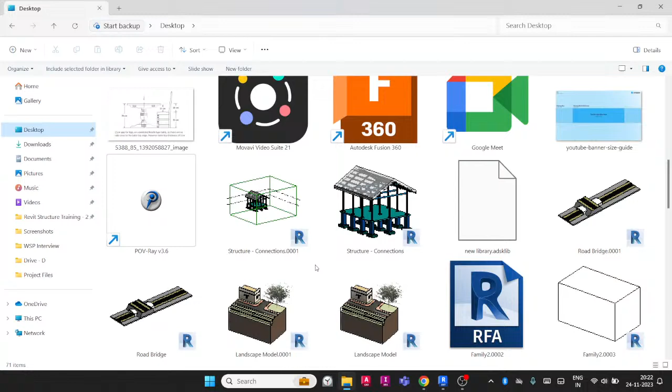So now let's go to the desktop. I'm going to create a new folder.

The primary structure, for BIM modeling, let's say: in a company, there will be a company name in a common structure. Inside the company folder, we will create one folder for the BIM team. Inside BIM, we are going to create a folder for the project name.

So in the project, we will have different folders. If there is a project, what will happen? We will receive some tender. So let's say tender documents, that is our input.

And there will be some working files, some files we are going to share, some files we are going to obsolete, meaning they are ignored. There can be other files also, so we need a working space.

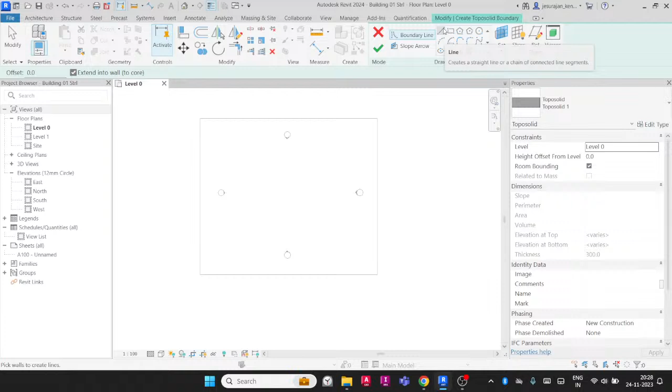If I go to create with a sketch - this is actually the topo surface, right? Let me create that surface first, and then finish. Let's go to view, 3D view, and this looks like a floor, but this is the topo solid, the ground.

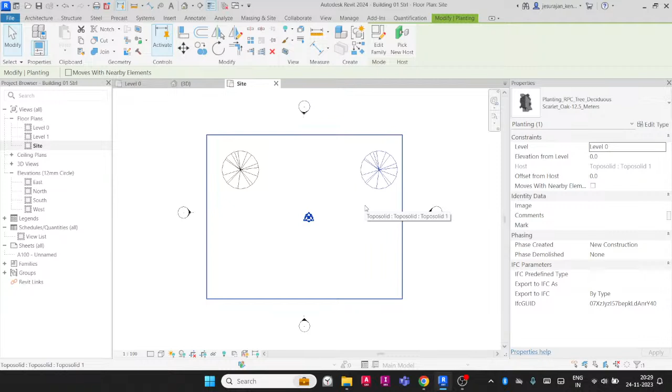If I go to massing and site, this is the topo solid option. I can also import a survey file, create with the create from sketch option. The second one is site component - site component is actually a library element. You can load it and select from the list and place it wherever you need - for example, a tree, an electric pole, a pump, manual pump, or a borehole, anything. You can just load it from your library and place it.

If you go to 3D view, so this is how it looks - these are RPC elements. If I go to realistic mode, you can see this is how it looks. Basically they are used to locate the tree. Actually the rendering is not our focus - our focus is to record building information.

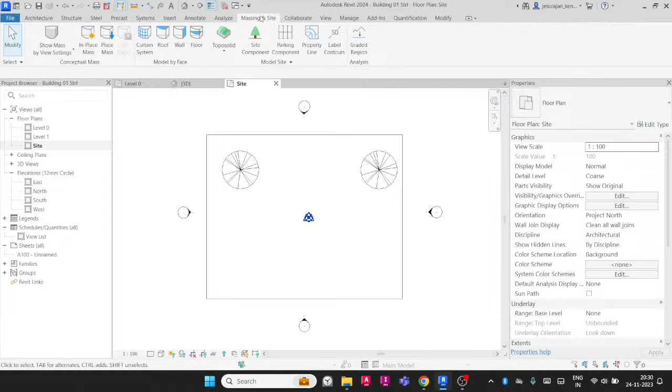Let's go to site, massing and site, and we have some parking component. In parking component, we have a category called parking, and this is my family - this is a library element. If I go to 3D, I can see them in 3D also, and I can see them in the 2D plan also.

The next one we have is property line. This is our property line - let's say I'm going to mention the ground around 500 meters or 300 meters. I can have the ground data, and then I have to mention where the road is, right?

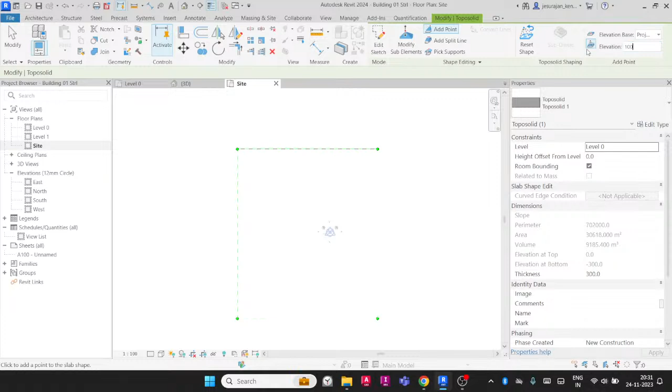Let's go - if I select this element, I have some modify options. I can modify this surface by adding a point. I can mention the height - add point height, let's say 100 mm - and I can give the ground level. In case you are loading from AutoCAD, then this point height will come from AutoCAD.

Yes. Okay. Yes, we can get. Okay.

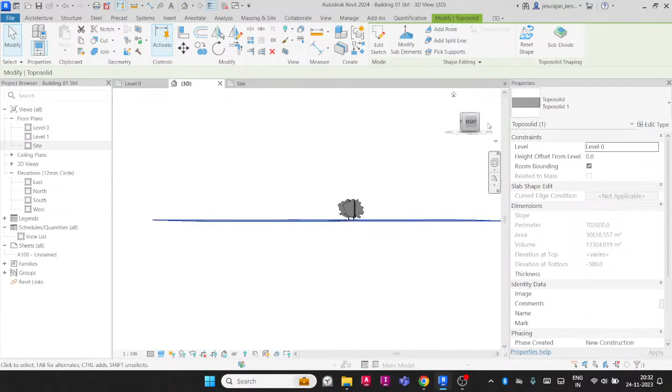Now you can see I have just taken add point, then I have added all this point. Once you finish adding the point, you can give escape. You can go to view, 3D view, and you can see the level difference. For now I don't see them much, right? So there are level differences, but that's not that visible - contour lines are not visible, right?

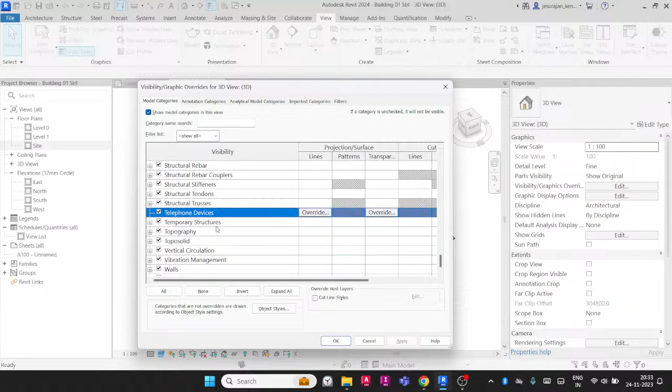To view contour lines, you have to go to the same, go here, go for property line data. Let's go to visibility graphics, go for site. So everything is enabled. One second, we have to select topography - topography, triangle edges. Okay.

Contour display - if you go to contour display, this will let you define from what interval you want to see the contour. For example, let's say every 100 mm I want to see the contour interval - then these are called primary contour. Or let's say every 500 I want to see the primary contour, and every 100 for the secondary contour. Start from below 3 meters and finish at above height 30 meters. Our level is coming in between at 0, right? Then it is okay - I'm going to say okay, okay. Now I can see the contour lines.

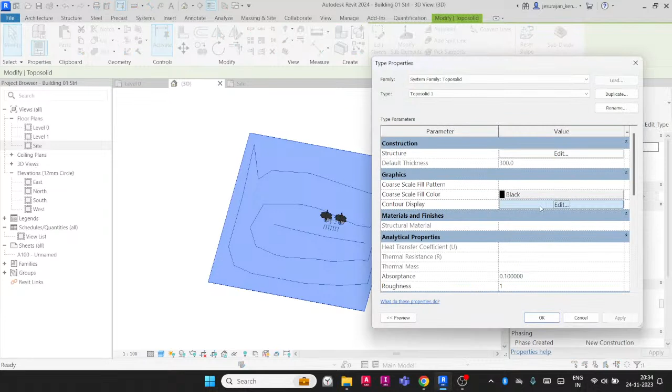You have to select the topography, go to edit type, go to contour display, go to edit, and set the settings there. Just do trial and error and you will understand. Say okay, okay, done.

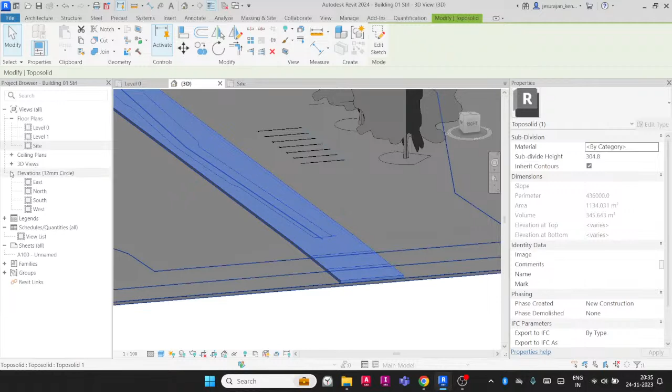Okay, if I go to site, I can mention this is the road edge. I can draw the zigzag line also, I can draw arc line, I can use all these tools to make my road boundary. So I have to know that this is my road edge, so for that we are using this.

Okay, now from my road, where is my property? So I should know my property line. So we have the tool property line. You have to draw the property line. You can draw by sketch or you can also enter values. Once you finish the sketch, you can just close.

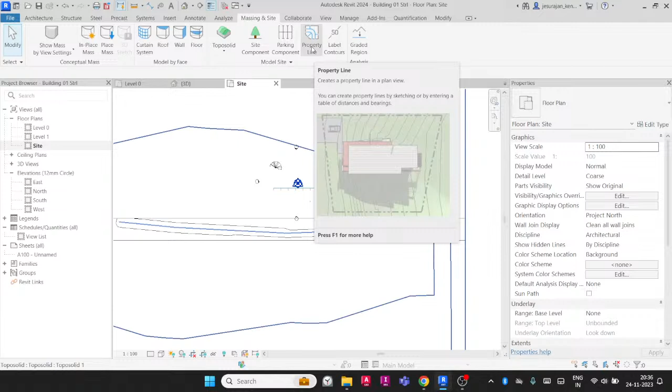You can also place annotations, northing, easting, coordinates you can place, like bearing you can place. Okay, property line, we have two options: create by sketch, create by entering distances and bearing.

Now let's go for sketch, that's always easy. And I'm going to say from my road, 1 meter. From the road boundary, in case let's say 5 meter. Okay, and this is my edge. And then I'm going to have, so I have offset, let's make it 0. This is like this way.

Okay, somehow it's like this, and this is my boundary line. Once I finish the boundary line, I can see the dash line, and I can also edit the table. You can see distance, northing, easting, bearing, line type I can mention. Okay, so this is our boundary line.

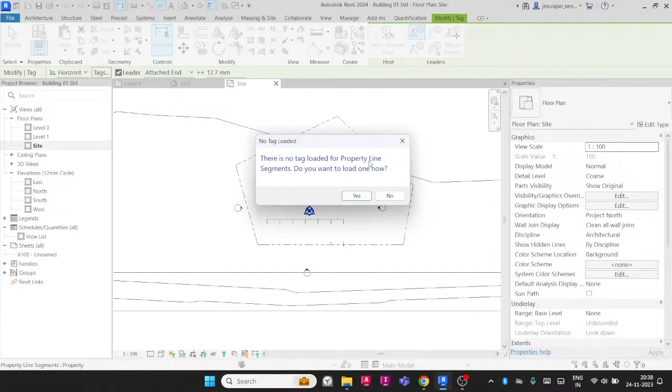We have to pin it, we don't want to miss the boundary, so we have to keep it pinned. Now I can go to annotate and I can tag the element. So this is showing there is no tag loaded. Say yes and go to US annotation and go for civil. Here go for property line tag.

Okay, so we have to choose 3, just load them. I think now it is loaded. Select and then change its type. Distance and bearing. Create similar and place.

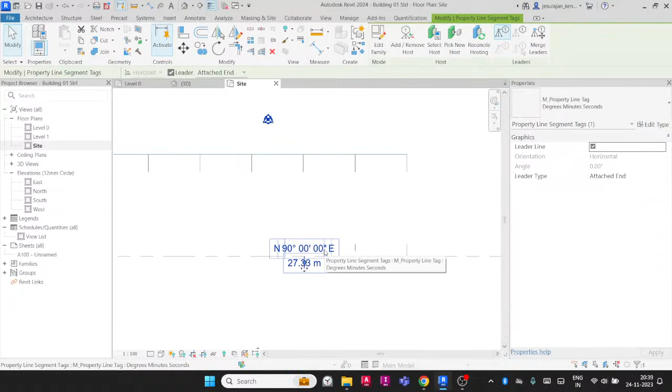So when you are doing a survey drawing or site map, you have to mention the property line. So to find the correct coordinate, actually this is not a GPS, so point to point we are mentioning the bearing. This can be with an error of 2 or 3 seconds, even a total station comes with a 3-second error.

Okay, so finally we have to get the average only. So how do we do it? The surveyor will do it, and he will give the distance and bearing.

So initially, how to take the coordinate, that was a question for me also. In case if you take Andhra, every state has its own geotechnical team, and they are creating benchmarking points, primary control point, secondary control point they are establishing. So from there we can take the coordinate and give reference to our project. There will be some error, but that is acceptable.

Yes, yes, they will give. Correct.

Usually for now they are doing it with Civil 3D, AutoCAD. You can also do the same with Revit. Once you are drawing it with AutoCAD, you can import and pick the lines. Okay, so now we have our boundary.

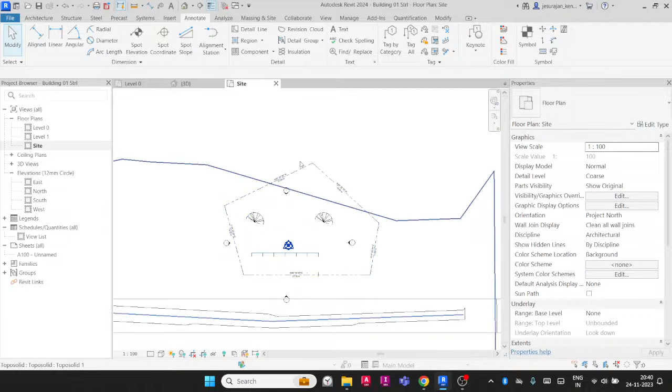If you go to massing and site, see this next one is label contours. So when I am labeling contour, I can mention its height. For example, I'm taking this tool, and you can see I have to just draw from one point to another point, and you will see the label based on the scale.

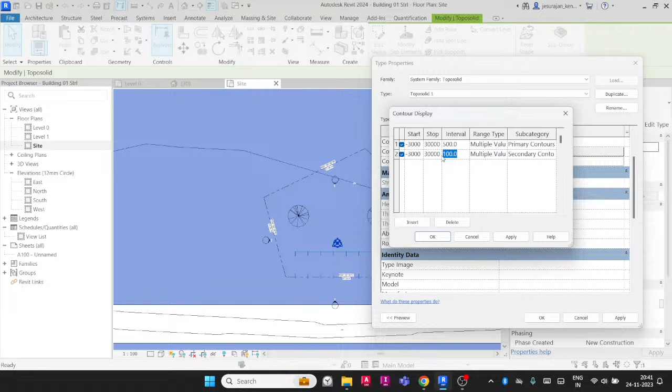The label text size will be bigger or smaller. So for now we are having only one number, right? In case if you want multiple numbers, you can also modify the contour styling. Let's go for contour display. In case if I have the contour interval every 50, then I'll get more lines.

Okay, so this is how we have to do contour labeling. Just take and draw one line. So wherever it is crossing, that's going to put a value. And how to edit the text size, dimension size, that you can go to edit type and check these values.

Now the next thing is graded region. So with the graded region, we are going to calculate how much it is going to be excavated or how much it's going to be filled up. Let's go to graded region.

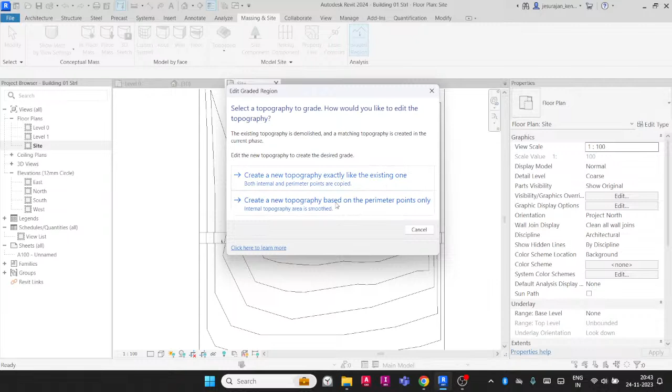So there are two options: one is create a new topography based on the perimeter points, or you can also put each point based on the CAD file. So create a new topography exactly like the existing one, then you can modify. So what I'm going to do, I'm going to use the second option and select.

Okay, so this is asking for saving the project. Let's save. Now what do I have? I have two topographies in the same place. The blue color one, if I select, you can see here.

There are two toposolid 1 elements. Both are looking like toposolid 1 only, but this one is gray, another one is blue. So select any one and keep the phase as existing.

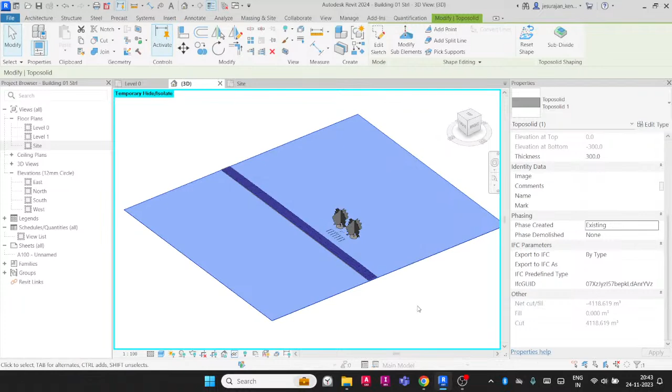Then select the second one and say it is new construction. Phase demolished... oops, sorry, none. It is new construction. So I have two, and when I select, I have to check whether it's new construction or not.

Let's go to modify. So this is actually in the new construction. Hide. This is existing. Actually, this is supposed to be new construction. Isolate element, that's the best way to find it.

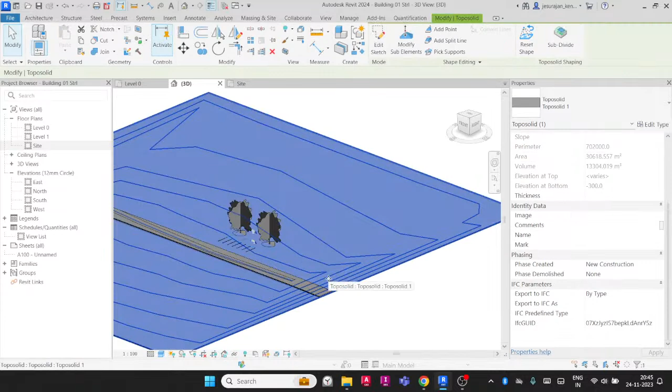Okay, edit sketch, modify sub element. So this is actually a new construction. Let me just give some -2 meter value, later on we can bring it back. So this is going to be the new construction, and this is actually existing.

So now let's say this is at 0, we have to keep it in the same level. Here when I select, this is showing existing. This is our new construction, and when I select a new construction, you can see cut and fill, area, volume, thickness, everything we are having.

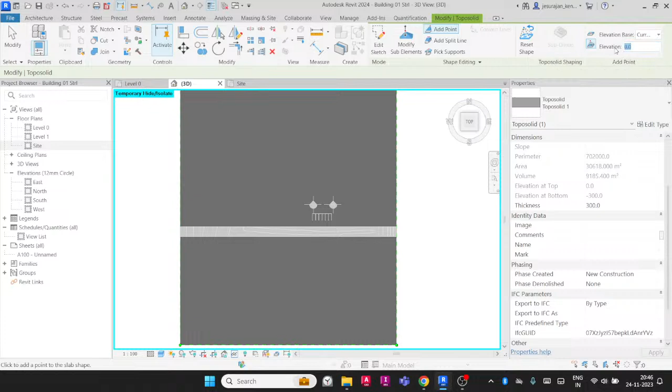Let's go to top, let's go to modify point. Let's say I'm going to elevate my site. Then I have to add point. Let's add point from current level, 3 meters. Let's say this is my site, I'm going to elevate.

Double escape. Now you can see I have a toposolid, new construction, and an existing one. Now if I select new construction, it will show cut and fill. This is actually calculating the difference from the existing one and the new one.

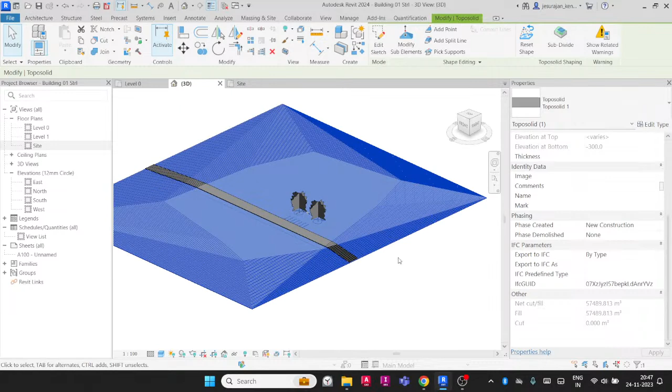So we have a small calculation method, that's it. You cannot calculate like Civil 3D. I can only mention what is existing and what I'm going to build as new. My site got elevated.

We can also see this in 3D. This is 3D, but this much only you will get. What graphics you get is this much only. We can also take a section across a line and see it.

So now what should I do? I have to enable show new only, I will see only one topography. So from here I can mention the excavation, then I can put my foundation.

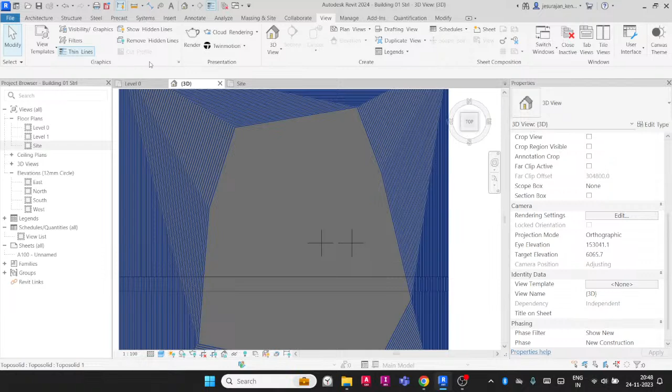Let me show you how to do the excavation. Let's go to architecture, go for component, and go for place a component. Oh sorry, component and model in place. Then take, you can take anything actually, let's go for generic model. Excavation.

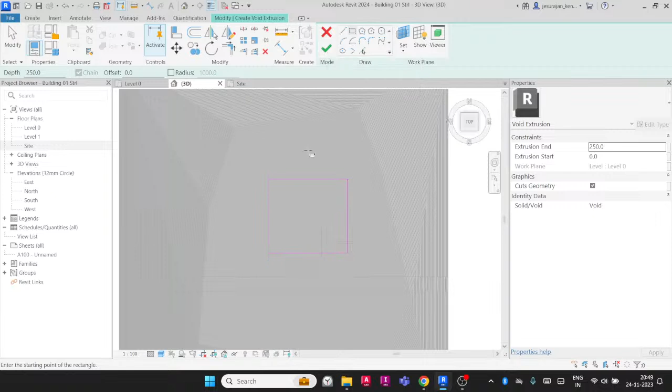I'm going to say this is a void, in kind of blend shape. For example, this is my internal depth, and this is my outer boundary at the top. Once I finish, I should be able to see them. So this is the void.

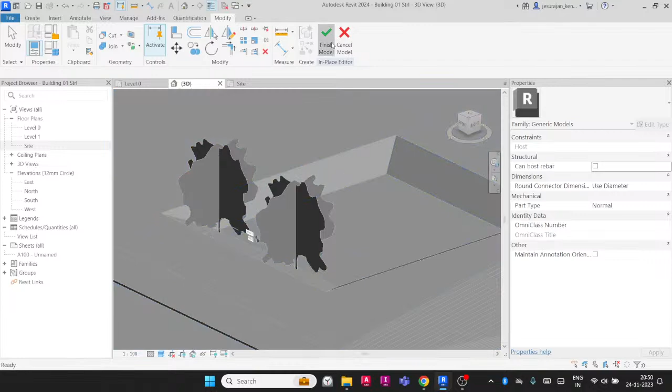Now how much deep am I going to put it? Approximately I can mention, you can also mention with the first end and second end option. I'm going to excavate till here. So once I finish, this is not cutting anything, let's cut the solid. Once I finish, you can see here my excavated site.

So this is how you have to model excavation. Select and make it as existing, and it is demolished in the new construction. So when I change the phase settings to existing, show previous phase, so this is the flat surface, and during or after construction it is going to be like this. So this is how you have to mention the phase.

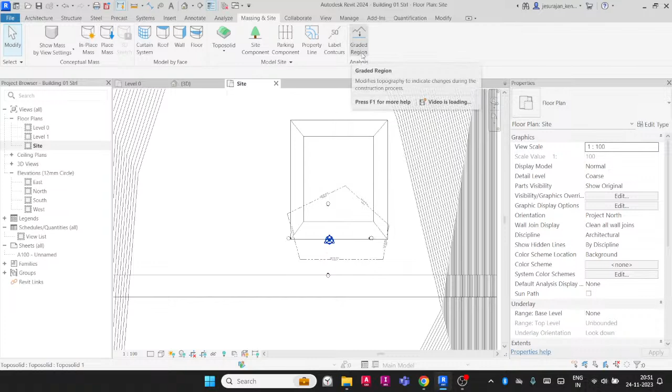I was just showing it for an example. So now you know what and all you need to know in massing and site. Now you know how to model topography, how to add site component, how to add parking, how to add property line, how to label a contour, how to show contour, how to use graded region, and how to excavate and show excavation. Remember the concept and logic, watch this video again and remember it.

Yeah, tell me. You can share, yeah.

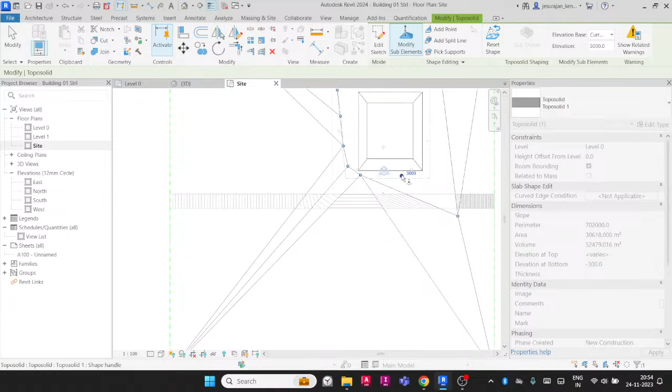Here I'm creating a scenario. We are filling our site, but we can fill within our property only. Outside the property, we cannot fill. So I'm filling 3 meters inside the property, and outside the property, it's going to be 0, or it will follow the original.

When I am adding the points, we have to be very clear.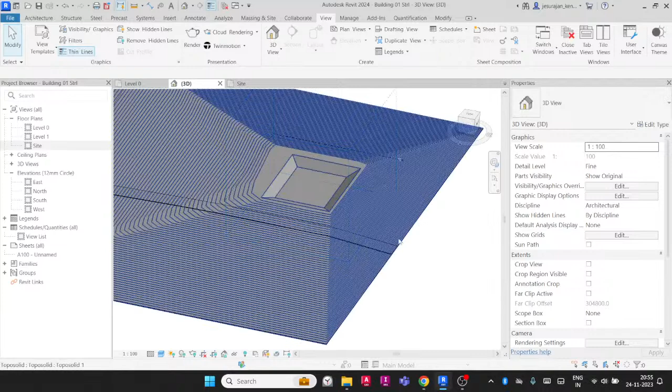So this is our project site. Now what to do? We have to go from the foundation, right? Or let us focus on architecture as a beginner, then we'll go for the structure. You have to learn both.

In case if it's a wall and there is a door, then you have to put the wall opening. That wall opening you can place by door family. That is why it's important to learn architecture tools and learn how they behave in Revit.

Let's go to site. So for architecture, what do we need? Focus on the concept.

I need a compound wall. Let's go to architecture. You can see here you need to learn what are the types of walls available in Revit.

We have a basic wall, we have curtain wall, that means the glass wall, and we have stacked wall. I have created a video to explain what is a basic wall, what is a curtain wall, what is stacked wall. Watch that video. As short, I can tell you that basic walls are simple walls, and they can have multiple vertical layers. Curtain walls are glass walls. Stacked walls are a different type of basic wall that is stacked one above another.

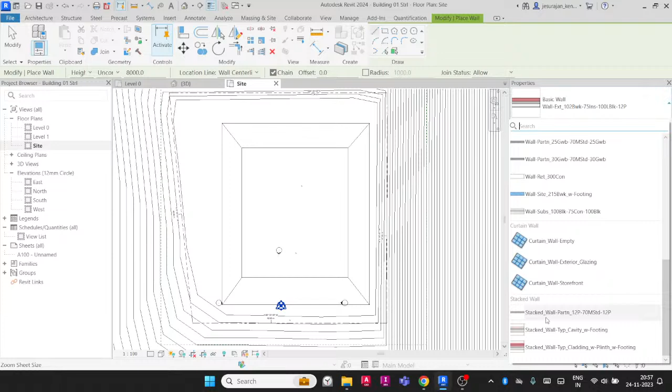Combined wall, yes. For example, the first 1 feet that is built by stone, next 3 feet built by bricks, the next 1 meter we have the fence. Yeah, that kind of wall.

Now for now, I'm going to take only the basic wall and mention my site boundary. So this is my site boundary. Let's go to Revit and you can see this is my site boundary.

Wall height also can be edited. Now, so we have an excavated area, so I can have a basement. Right, I can have a basement.

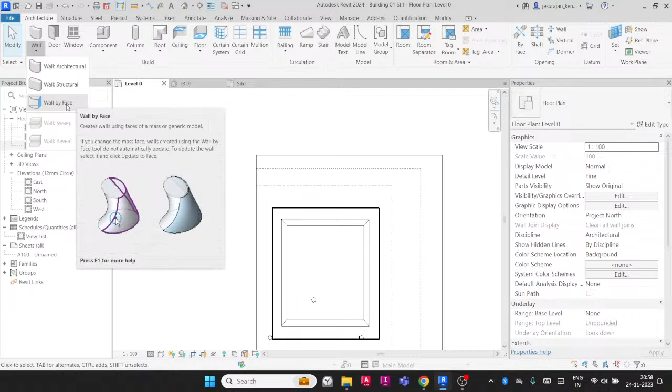So first of all, you need to know how to model wall. That's what important. I am taking the wall. It can be architecture or structure. I'm going to show you how it works, this wall by face later on. Now let's focus on architecture.

The concept is very simple. I am taking an architecture wall, and I'm selecting the wall, and you can see here this is showing instance properties, and here you can see structure, and it is unchecked, but I can check them anytime. Now this wall became structural wall.

I am going to take structural wall. I'm going to draw the wall, but that's not visible. Let's create it by height method, connect up to level 1. I'm going to draw the wall. Now it is visible.

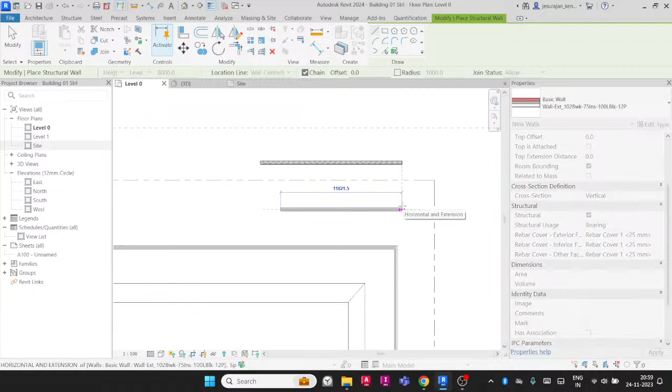Place, select, and you can see it can be any wall type, and you can see by default structure is enabled. That's the only difference. Before, depth was enabled, so by default the wall is going below. That is why it's not visible. If you check our view range, you can see this is going till 0 only. If the wall is going down below 0, it will not be visible.

View range: there is a building, we have to cut the building to see the top line, and we have a range of depth. So concept is very important.

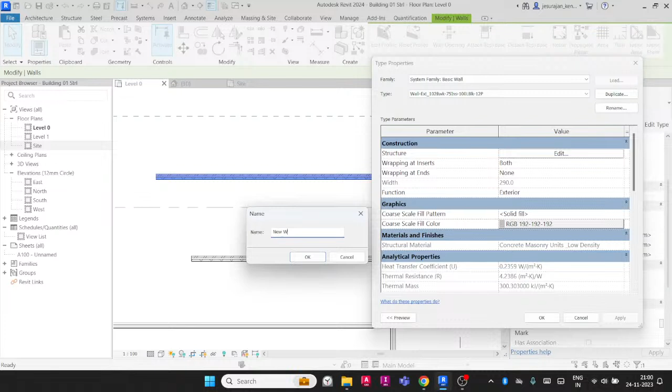So now we are learning basic wall. Let's go to edit type. I'm going to create a new wall type. Let's go to duplicate. I'm going to write it as new wall type. Say okay. So I have all the options I can edit.

So first of all, you need to know every property, but primarily you should know the structure. I can also show the preview. So this is the wall, vertically this is the wall, we have multiple layers. You can enable preview, you can disable the preview. You can see here, if I select the layers here, you can see the preview.

I can mention what should be the thickness, I can mention the material, I can mention what function it is. Is it a finish layer? Is it a core structure layer? Is it an air gap? Like that you can mention. So we have these types: structure, substrate, air layer, finish 1, finish 2, membrane layer, the waterproofing layer. We should have one layer for core, and it should have thickness. We cannot give 0 thickness.

You have to mention whether it is structural material or non-structural material, and whether the thickness is varying or non-varying. That's all, and we have other functions also. I've created a video for wall, you can find that. The basic thing is you have to understand the concept here. So this box is for the layer setup.

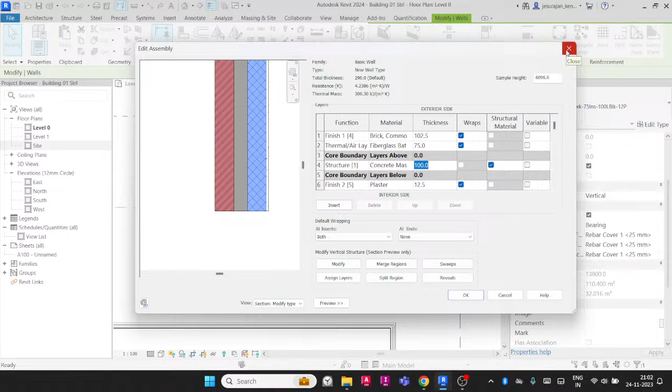When we come to the bottom, there's a wrapping option. What is wrapping? You have to understand that. Let me show you a small example before we go further.

I'm going to create a wall 200 mm, and I'm going to mention the plaster thickness of 15 mm, 15 mm. I'm selecting this layer, and since I don't want that layer, I can delete it.

Now I have one structure and I'm going to mention the material. You can see here I'm clicking the rectangular box on the right side. You have to click here, and search brick common.

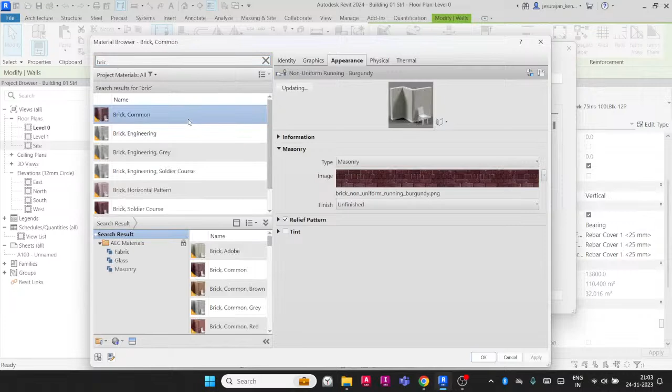Material also has different properties. You can also set the graphics - we'll see that in detail later on, a video is also available in the channel, you can check. So now I'm going to select any one material and say okay.

You can see the preview here, and at the top I'm going to mention this as finish 1, and the bottom layer also as finish 1, and I'm going to check the thicknesses: 15 mm and 15 mm, and structure is 200 mm.

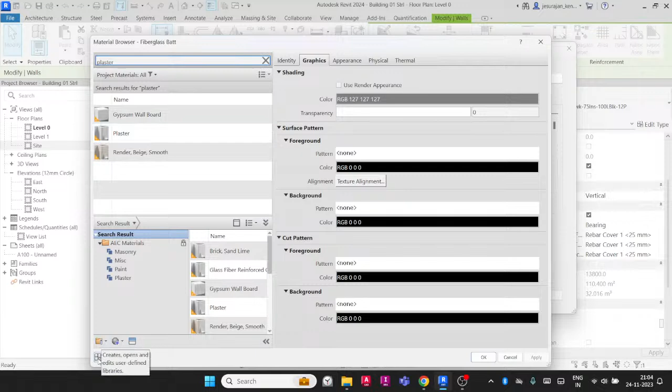Now see here, I have material but I don't have any plaster material. Oh, plaster material is available. If you don't have any plaster material, you can just say by category - that means no material assigned, and by category it will show the graphics. As we have plaster material, let me select plaster.

Say okay. You can also copy the name and paste it - plaster. And I have to show you what is wrapping option, right? For now, at intersect, I'm going to say do not wrap. At the end, I'm going to say none.

Now you can see here we are having the core layer and side by side we are having the plaster, but I don't see any graphics. If I go to level 1, I am in level 1, the wall goes from 0 to 4 meters, but it's not showing the dash line. Why is it not showing the dash line?

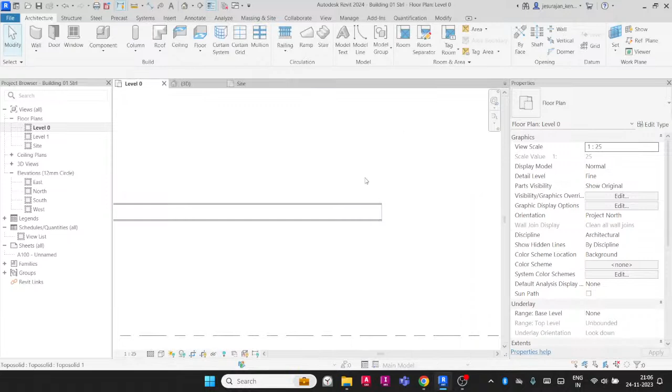There can be multiple reasons. The main reason is scale. Let's go to visibility graphics - this is for the wall. You need to know what visibility graphics is. I'm just typing VG, let me just check a few parameters.

Select. Okay, you can see some hatches there, but it's not visible. I want to see why it is not visible. So let's hide those elements, let me go to site.

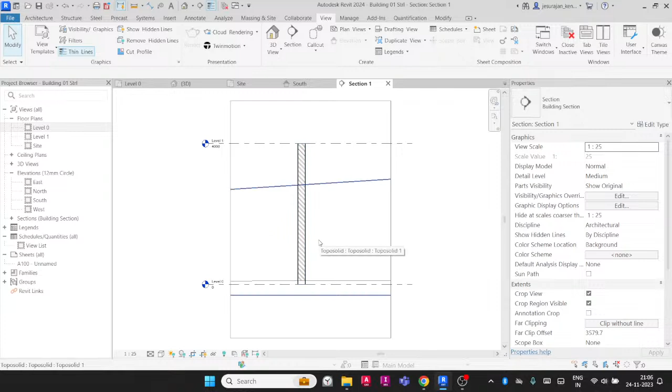So this is coming here. Let me take a go to view. Let's take a section, go to view, and you can see this is coming from level 0 to 1, and this is my hatch. I am cutting the wall at 1500 millimeters, but I don't see the hatch. Why don't I see the hatch?

If I select, if I go to edit type, if I go to structure, common, you can see I have a surface pattern. I have a cut pattern also.

In cut pattern, the background is black. Let us change it to white. And brick pattern, let us change the color - foreground color, let us change it to black. And background, no pattern, none. Everything is correct.

This is for cut pattern. Let us change the color to something else - color can be a reason. But this is not visible. So there can be multiple reasons, I will tell you why it is not visible.

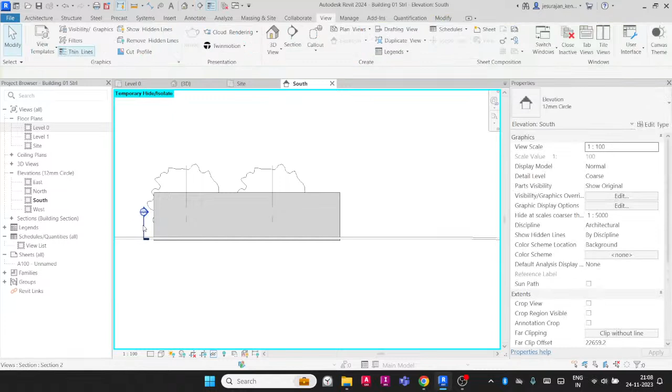This is a problem. I can see the pattern, but it's not visible. Let me take a section, rotate the section 90 degrees, and now it is horizontal, it's there.

Right click, go to view, and in the section I don't see the pattern. Let's go to edit type, surface, cut pattern, background - we choose any concrete fill. In foreground there is some.

Let us see if it is working now. It's not working. I will show you later.

By default we will not have any problem. Now I have 3 layers. If I go to architecture and take a door and place the door - my god, see, now it is visible.

Oh, this is a structural wall, huh? Uncheck. Now this is an architecture wall and this is my door, placed at level 0. A serious graphics issue.

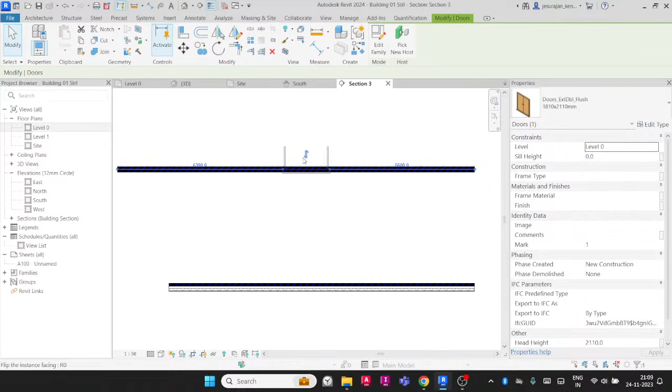If I change this to coordination, oh, okay, so now see here, you can see here, this is a door.

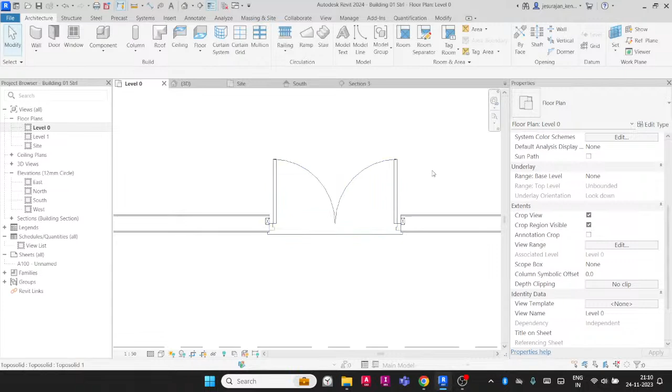There is a problem. Okay, let us see. This is my door, but you can see here the plaster layer not wrapped. You can see here the plaster layer comes and stops here.

Yes, and in the end also not there. If I select, go to edit type, edit structure, and say interior side, and say okay, you can see end is closed, and only interior side is closed, exterior side is open. Select, go to edit type and change this wrapping to both side. Say okay. Now you can see both side it's wrapped. So that is what the wrapping option.

And in the bottom we have modify vertical structure option. That's an advanced topic. First focus on the basics first.

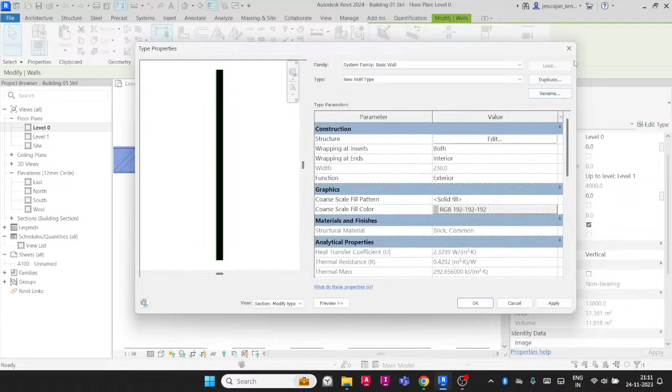So now I know how to create a wall, how to duplicate a wall, how to edit the structure at basic level, and I also should know how to edit in case if the height is varying for the wall. Let's go to section view, and this is my wall.

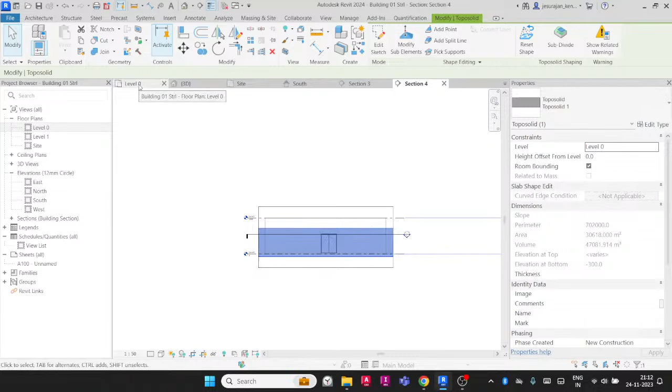I was not able to see the hatch pattern because of my topography. For example, if I hide my topography, I can able to see the hatch. So because of topography I was not able to see my pattern. So now I know what to do.

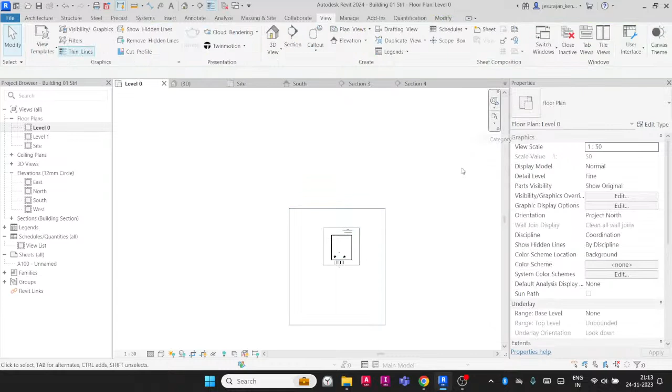This is my topo solid. Right click, hide in view category. Now I can see my pattern.

Now I am in the section. I'm going to hide the topo solid, hide in view category. So this is my wall. This is my wall in elevation. My wall is not a rectangle, not a regular shape.

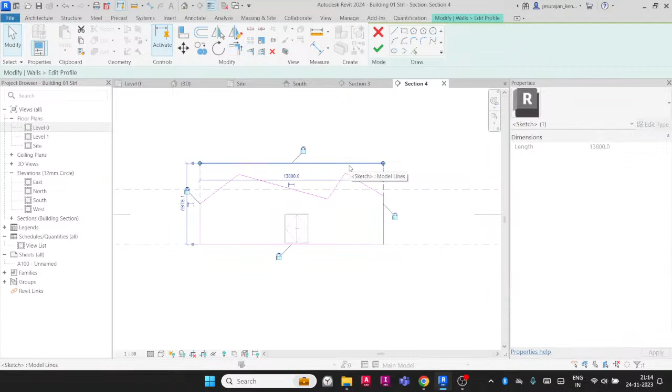Now how to modify the outer boundary? I can go to edit profile and I can draw the boundary. I can trim the boundary and I can say finish. You can see here the wall is modified.

You can modify your wall in any shape vertically. We have to go to edit profile and you can draw internal rectangle, internal lines, and that will become the opening.

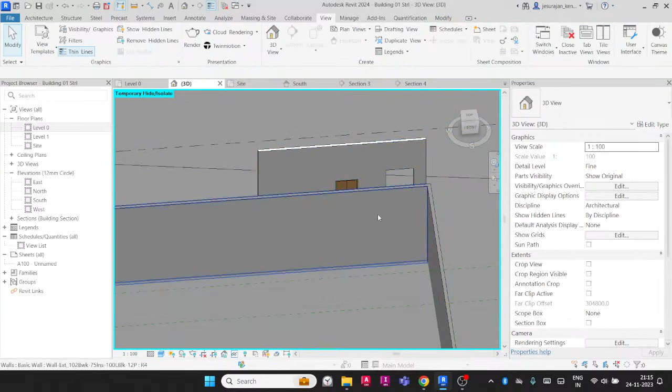You can also reset the profile in one click. You can go to edit profile, draw internal opening and finish. This is an opening. You can see here. So this is a wall and you can see this is the opening.

Edit profile, I'm drawing a circle. You can see here this is the opening. Select edit profile, you can modify the profile, remove constraint, finish. Select, go to edit profile and make the changes.

The next option is wall opening. You can create only rectangular opening only. You can see here I'm drawing an opening. So that's all you can do with the wall opening, but you can select, edit profile, and create custom wall opening.

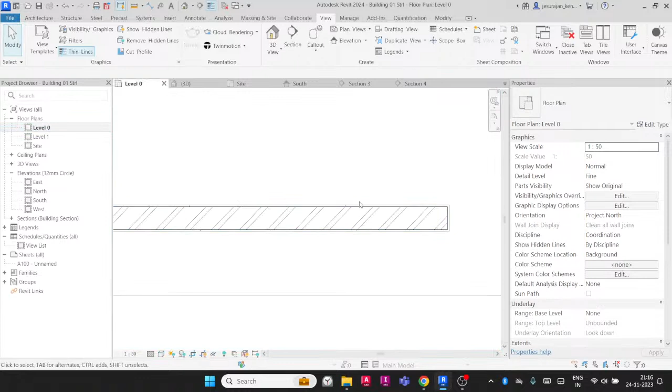Okay, this is about wall. Let's go to level 0. You know how to place the door.

If you go to edit type, if you want to create a new type, you can go to duplicate. You can give a new name, and you can modify the parameters and your door will be modified. Creating a new type of door, creating a new type of window is easy. Select, go to edit type, duplicate, give a new name, okay, and modify the parameter. Easy.

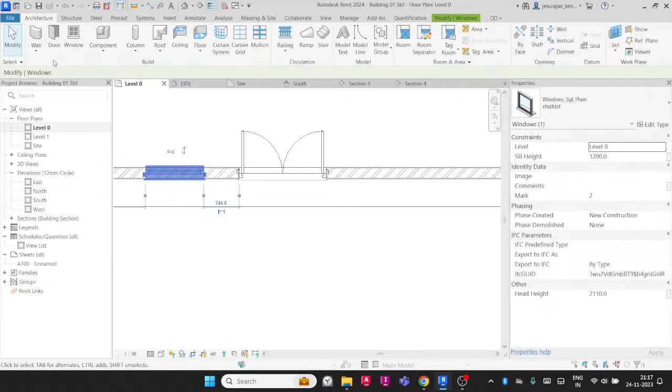Try to create a small house, draw all the walls, draw door, and place window and show me once. I have created some sample models in my channel. You can go through, there will be exercise file 1, 2, 3 and you can also try.

Now I'm going to show you how to create the floor. Floor is easy. You can go to floor, and same like a wall, we have architecture wall, structure wall, and we have floor by face, we have slab edge. We'll see one by one. Select.

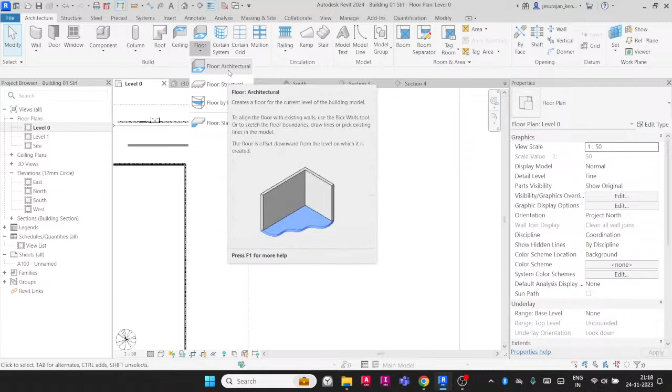Yes, you have to select the floor and then draw the boundary. We have another two options: one for floor slope, one for span direction. Span direction is required for structure - we mention the direction of reinforcement, one-way slab or two-way slab. Even though it is architecture, you have to mention span direction.

Just click and place in any of the outer wall. Revit won't say what you did is wrong, it won't show. We are having the option to mention the slope. If you don't mention the slope, it will be a flat slab. That's all.

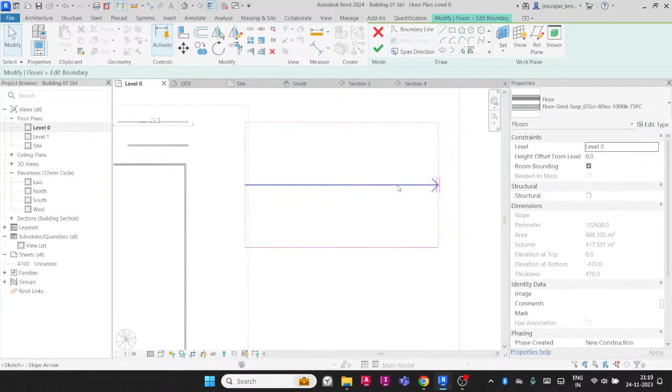In case if I go to edit boundary and add the slope from here to here, when I select the arrow I have an option to mention the slope. Let's say it is 1 meter higher at the other end. If I finish and go to 3D view, you can see...

This is the floor, and you can see here this is the floor. One side is 0, other side is 1 meter. You can see the top is matching with the level, the other side it is 1 meter.

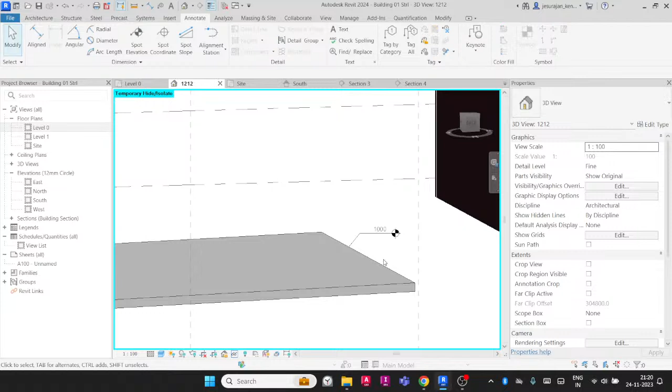If you want to check the level, go to annotate, you have to lock the 3D, and then you can mention spot elevation 1000 mm. So this is how we will mention the level.

Let's go one by one - we are focusing on basic modeling now. Now let's go to ceiling and sketch. Even the ceiling has the same function. We have to draw the boundary and mention the slope in case if it is there.

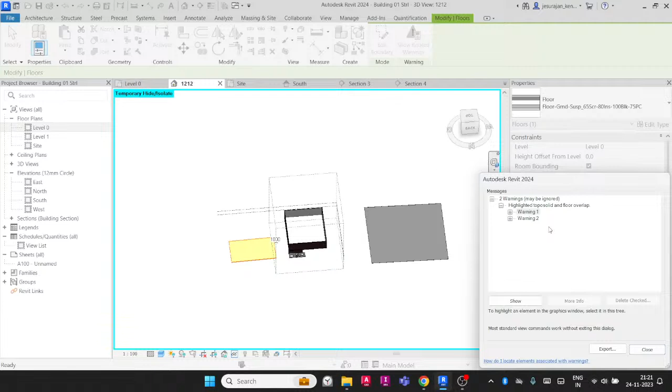Select the arrow mark and mention the slope - you can mention any slope in any direction. Edit boundary and you will see the options. When I select both the floor with the arrow, I'm getting the same option. If there is any warning it will show, but here topo solid and floor are overlapping, which I already know.

Select, if I go to edit boundary and finish, you can see here - if I select floor, I get the option to modify subelement. If I select the ceiling, I don't get those options. So that's the only difference.

These options were available in the topo solid also. These point element and split line element work the same way for topo solid and for floor. You just have to modify the sub element and add points.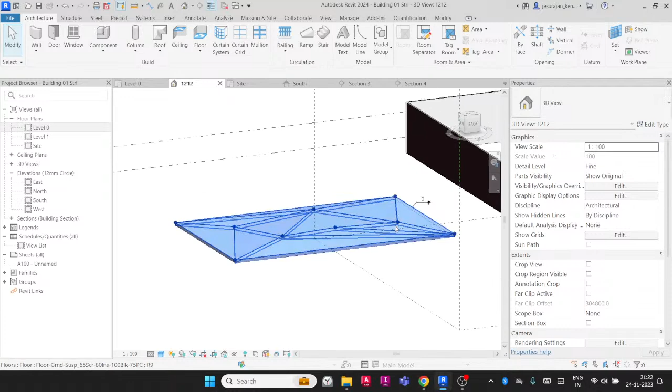Double escape to finish. This is your floor - you can mention the slope or gradient with the modify sub element option. That's all. Now let us focus on a roof.

Roof - we have different types of roof. The common one is flat roof; every concrete building will have flat roof. If you take a US house or old buildings, they will have a pitched roof. Revit has a wonderful tool for pitched roof.

If you go to roof and take roof by footprint, that means by sketch method, you have to select any level. You can see the same options - we have to draw the boundary and take the slope arrow. But you can also mention the slope by outer boundary option.

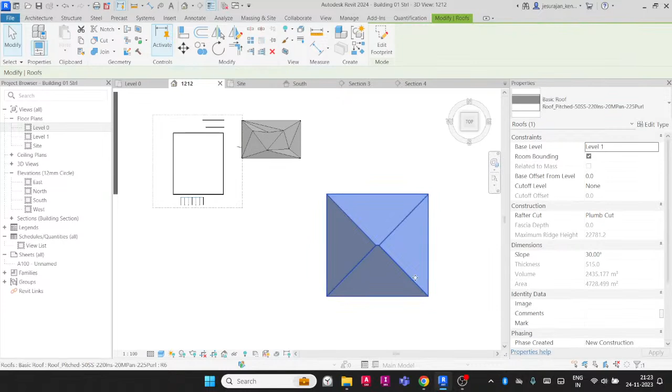If I select the boundary, you can see this is 30 degree slope, and this is also 30 degree slope. That means all four sides have a 30 degree slope - that gives me a pitched roof.

So we have different types of slope for roof, and in architecture terms that has different names also. But here we are studying only the tool.

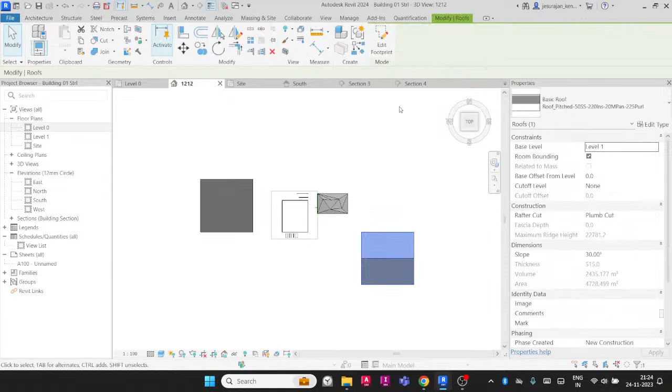If I go to edit footprint, let's say these two sides don't have slope, and finish - you can see here. Going to edit footprint, select the element, then select the line and define slope. Finish. You can also bring it up or down.

We have other methods also, we will see one by one. If there is a slope option and you are not mentioning any slope, what will happen? This will be flat. That's all, easy.

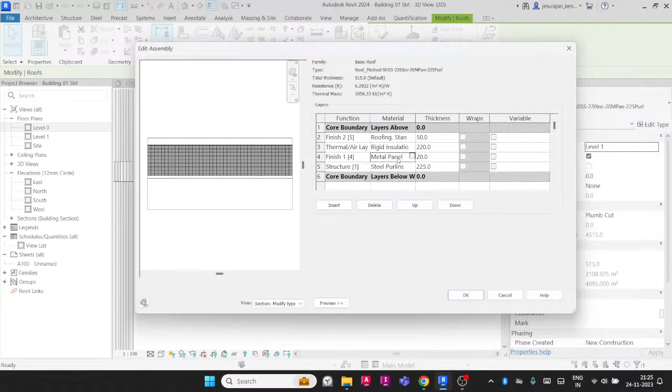The concept is very simple - you are mentioning the slope. If I go to edit type, I can mention the layers of roof. The roof will contain finish on top, a thermal gap, and a membrane for waterproofing. At the bottom there will be a structure. In case it's a steel roof, it will have these arrangements, based on what type of roof you are going to build.

Generic roof - if you go to edit type, structure, you'll have only one thickness. If I take a pitched roof and go to edit type, I have different layers. You can also create your own roof. I hope you understand.

There are some advanced topics that need advanced understanding, but when you're beginning, try with one option. Every step we learn from the basic, and when you start modeling, you'll have thousands of questions. You can ask me.

Once you get a question, write it down and keep it for asking, then move to the next one, and you'll find the next question. That way you can ask multiple questions at a time. For example, in one day you can ask 10 types of questions and I can answer. That's the best way to learn quickly.

There is a different method. I'll tell you what else you can do with the roof. We also have the curtain system. This curtain system works with the massing.

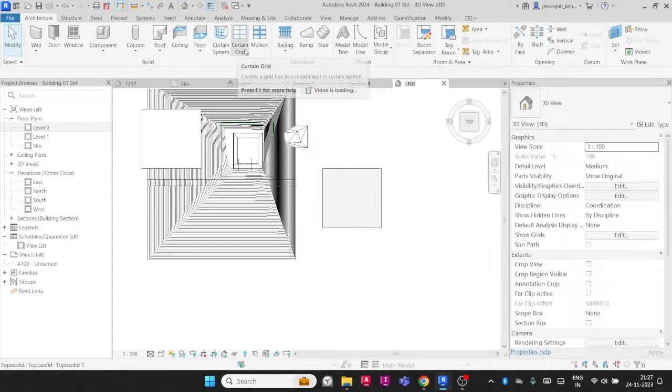We'll see them later. The next one is staircase, railing, and ramp - we'll cover those tomorrow. After that, everything else is only opening and room, which are for annotation only. Except for ramp, staircase and railing, you have learned almost everything. Now quickly I'm going to show you the concept of curtain wall.

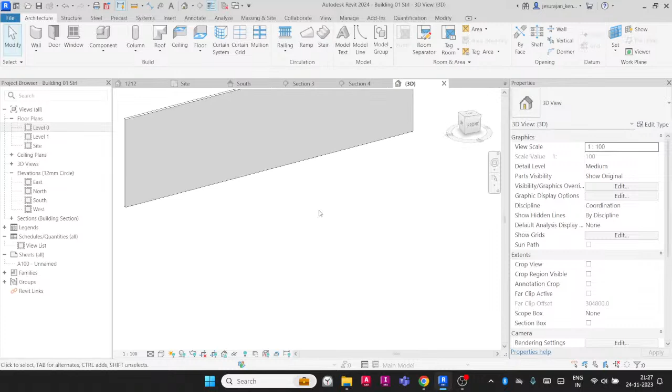Curtain wall is a basic type of wall. I'm drawing a wall. I've also created a video on this curtain wall - every topic I have already made a video for. You just have to go to my page, search the keyword, and watch the video. If you have any doubt, we'll discuss it in class.

For a quick understanding, let's say this is the curtain wall. For that, I have to select it and change the wall type to curtain wall. I can show you a type - here you can see this is a storefront, and you can see the glass, but I don't see any structural frame.

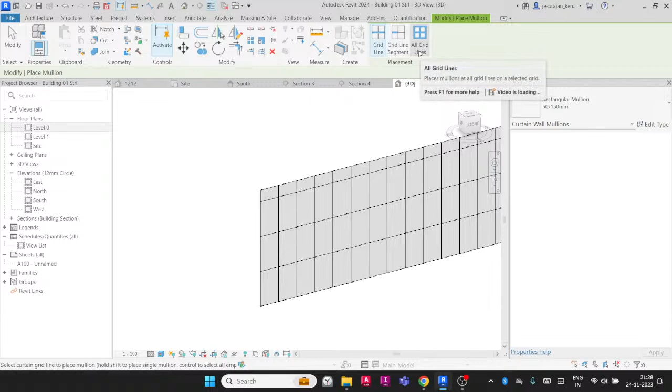Yeah, there is no frame, only the glass is divided. So if you want to add a frame, you have to go to Mullion and select all the grid. You can also add grid by grid, or by segment. I don't have time, so I'm selecting all the grid lines and selecting the wall, and you can see we got the frame.

I'm going to show you one more. Let's draw the wall. I'm selecting the wall and changing the type to curtain wall. Now this is a simple single wall with no division. In case you want to divide it manually, you can go to the type property.

Go to the type, and mention what should be the vertical division method and what should be the horizontal division method. You have different methods: fixed number, maximum spacing, minimum spacing. In case you're doing it manually, you have to go for curtain grid - first you put the grid in the wall.

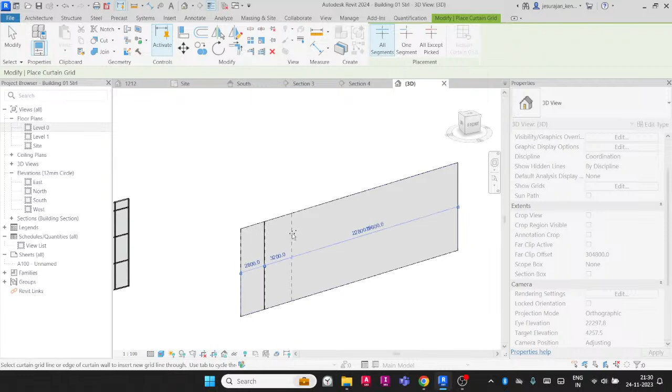Now this is a simple glass, a single glass. I have to cut the glass first - go for curtain grid, and then split the glass. You can see here, just to split the glass. You can also add a single segment.

You can also go for different options: all segment, one segment, all except picked. Now the glass is split.

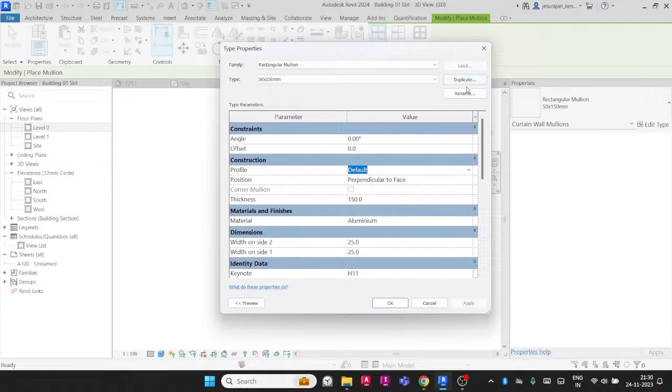Now I have to add the frame - go for mullion. We can choose the mullion type here. If you go to edit type, I can select a different profile, but we'll see that in the advanced class. I'll show you how to set the mullion type later on.

I'm just going to select it from the list and pick the wall. You can also pick one by one, segment by segment, or go for all lines. Now I want to move this vertical line somehow, right side or left side - I have to select the grid and move it. I can also enter the value.

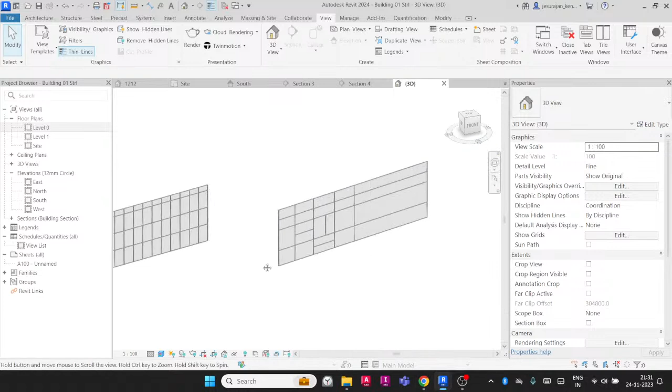Easy. So this is just an understanding - now you try some small building. I have created lots of sample example models.

Go through my YouTube channel, or you can also watch other YouTube channels - just search and learn from videos. If you have any doubt, we can discuss it in class. Make use of this class.